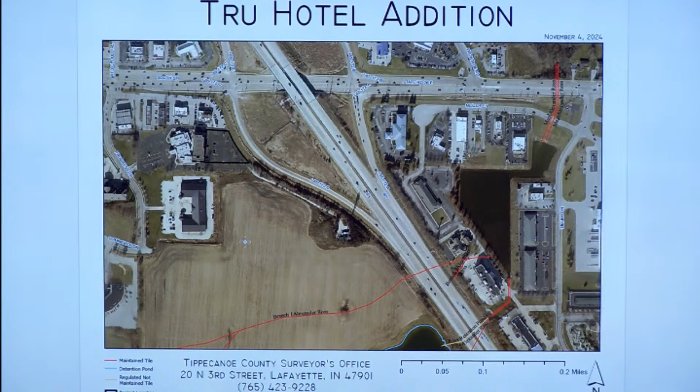It's not shown on here, but a portion of the project is to construct approximately 15,000 square feet of temporary parking lot on the vacant land to the south. So basically some of the vacant agricultural land will be replaced with a temporary parking lot.

The reason we're asking for that variance to provide stormwater detention fees for the Alexander Ross Regional Detention Facility is because we expect in the near future there will be a larger development of another hotel on that vacant land. Both properties, the Doubletree and that vacant land, are owned by my client, and it is their intent to build another hotel. We're just asking for those detention fees to be deferred until that larger development for the hotel is complete, at which time obviously we'll come back and request approval for that project.

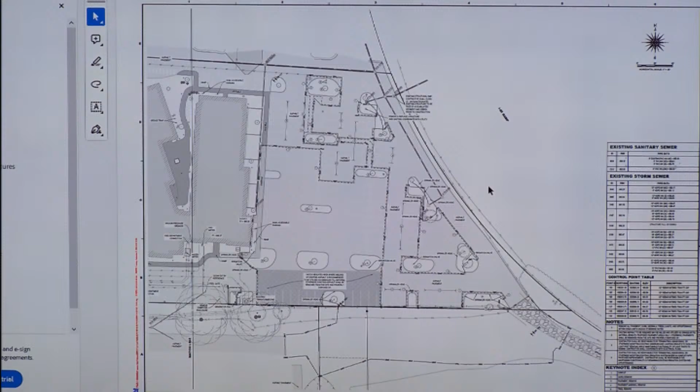And basically that's the summary of the project. Again, we're asking for an exemption for the improvements on the Doubletree site due to the negligible amount of increase in impervious surface, and a variance to defer stormwater detention fees into the Alexander Ross for the temporary parking facility south of the subject site on the existing vacant ground. Okay, if you have any questions.

Thank you. Zach, any comment? Yes, thank you, Pat. I just want to point out real quick, as Pat said, this is inside the city of Lafayette city limits, so the city will be reviewing the internal workings of the site, but they're here in regards to the Alexander Ross County Regulated Drain Watershed, and the discharge.

One point, Pat did a good job of explaining everything, but for the meeting minutes, I would like to make sure that the word variance is not used, because we're wordsmithing a little bit, but they're not asking for a waiver from any requirements in the ordinance. They're only asking to defer their requirements to the next phase. And so I would prefer we don't use the word variance. Deferment is what is actually and truly going on.

I have met with Pat and other representatives with the consultant and the owner. They are fully intending on complying with the ordinance and the stormwater drainage fees for regional detention in the next phase of this project. So I wanted to clarify that for the meeting minutes. Other than that, I'm ready to recommend approval as presented and happy to answer any questions.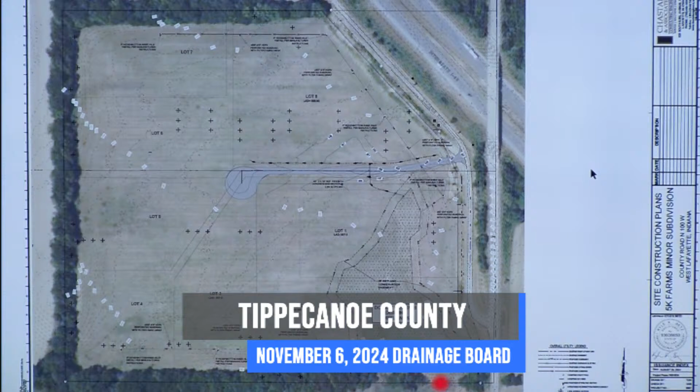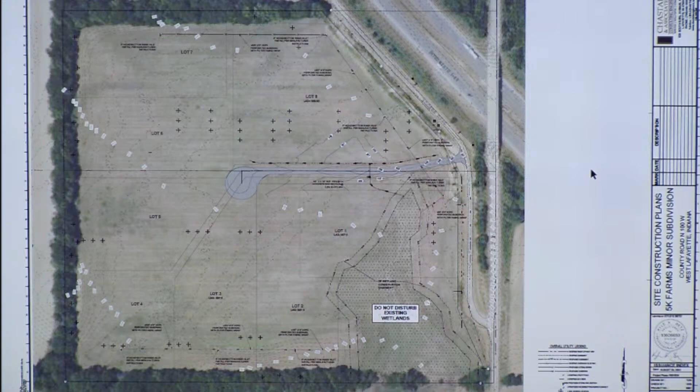I bring that up because, number one, by the drainage calculations they provided, they certainly scientifically and mathematically show, within the confines of our ordinance, that they meet the detention exemptions per the Tippecanoe County Stormwater Drainage Ordinance. Number two, by reducing that 100-year runoff by basically half, the amount of water getting to this wetland area will be greatly reduced moving forward, meaning the adjoining landowners to the south will see a reduction of flooding in this depressional storage wetland area. So they should see it as a benefit. They certainly meet the criteria within the ordinance, so I'd recommend approval as presented.

Okay, thank you. And I'm happy to provide additional information if you want more on the wetland situation.

Any questions from the board? So, Zach, you're saying your office has heard of drainage issues along that southern border there?

Yeah, I can at least share that the southeast corner of the wetland is a depressional area. Our map doesn't go quite far enough south, but the breakout is along the driveway that goes back—you can see on the very south end there's a house there. The area that we have marked as a wetland, as well as much of that northeast corner of the parcel south of us, hemmed in by the drives there, is all depressional area as well.

So that's a wetland as well? Yes, essentially, most likely. Our delineation started at our property line and went north. You can see from the photo what parts of the property are farmed—much of the wetland is currently farmed. It really just depends on the season and water flow. If it's a wet season, they don't get as much yield out of it; if it's dry, they farm right up to the property line. But yes, the depressional area there covers down to that drive.